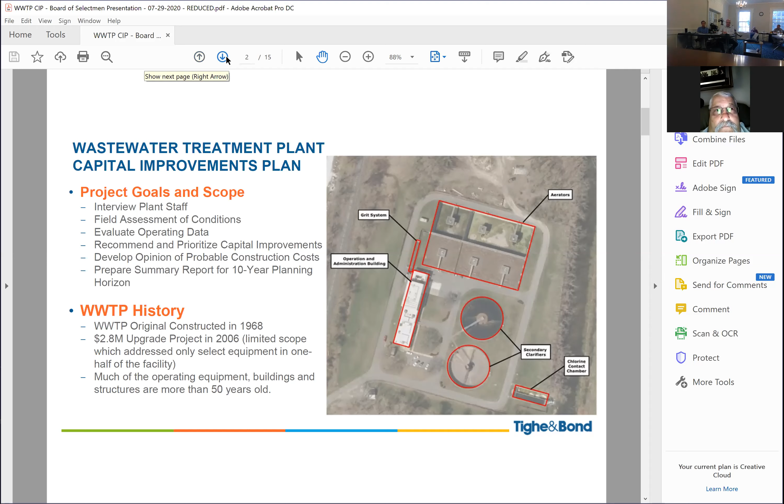NPDES - National Pollutant Discharge Elimination System. Yeah, thank you. We're engineers, we talk in acronyms, sorry.

My goal in these slides is to step through them pretty quickly, just to give you a flavor of what we were seeing. We wrote a report that was 70 or 80 pages of text and several hundred pages of attachments. I just want to give you a flavor for what we saw more than anything else. There are some cost tables on the back end of this, but my intent isn't to go through those in gory detail - really just to give you a broader understanding of what we're seeing at the plant, to help you understand some of the details behind the discussions happening.

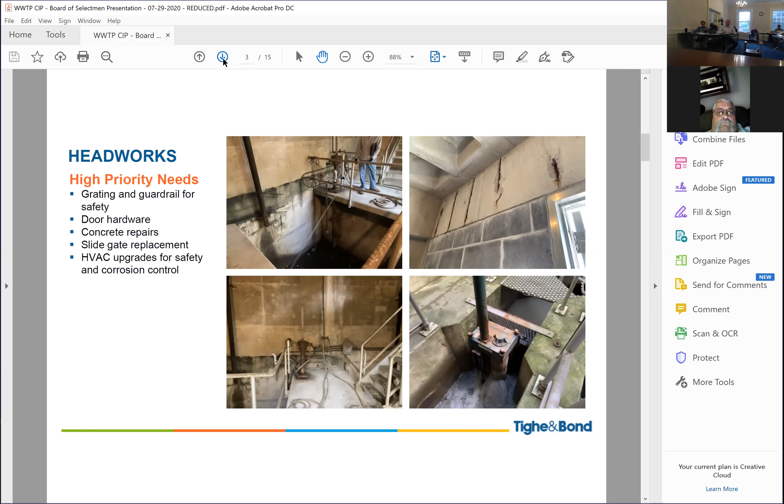In addition, as Jay mentioned and questions have come up, there's quite a bit of mechanical redundancy in this plant. So if a pump failed, it wouldn't be a catastrophic issue. The consequence of failure isn't that high if a single pump fails. So we're not recommending replacing 50-year-old pumps. That's a lot of cost. It's something that's eventually going to have to happen, but in this 10-year planning cycle, you've got other more important places to spend your money.

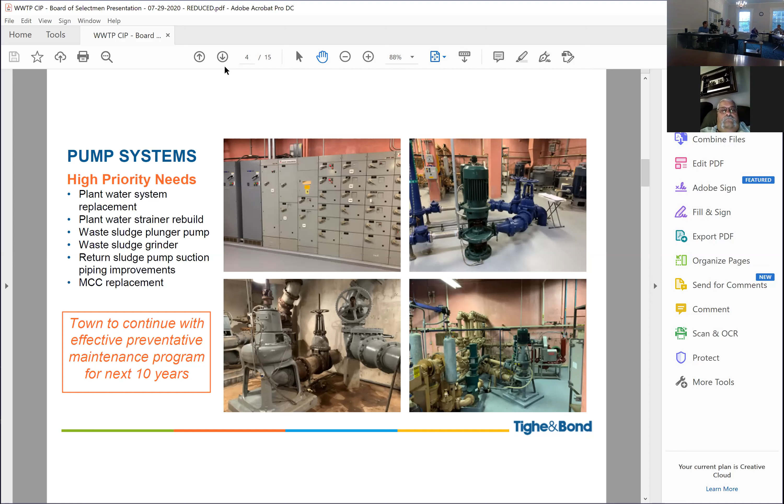To point out, the plant water system is kind of the lifeblood of the plant - it's where you reuse water from the plant instead of using domestic water. It's a way of using plant water for different services all around the plant. You save a lot of money by having one, but you have to maintain it for years. If you've ever walked through the plant, you'll notice the piping is labeled processed water - that's the same thing. But that pays off over the years compared to domestic water use pretty quickly. They'll upgrade that.

Our recommendations are it's time to put some money into the grit system - replacing these chain and flight grit sludge collectors with new sludge collectors. The gates are heavily corroded and need to be replaced. There are some minor concrete repairs - the concrete itself is in good condition, but it wasn't built as one giant monolithic pour, it was built with construction joints, and those joint sealants have largely failed, so it's become a pathway for corrosion.

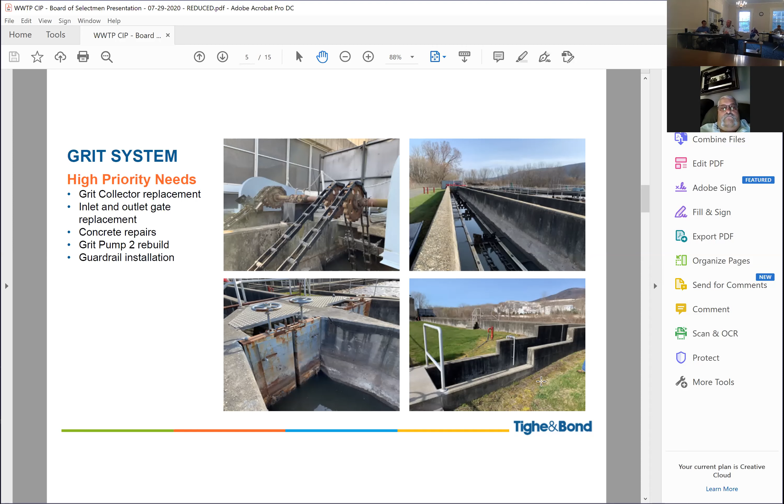The front half of the aeration tank has only been used for the last 15 years. The issue is the town hasn't been able to do any maintenance on that. There's, I'm sure, feet of heavy sludgy material packed into the corners. If one of those areas ever fails, you don't really have a good, reliable redundant backup. The north half is operable, but it's mechanical equipment that is rarely operated, 50 years old. I'd be hesitant to say you'd be able to rely on it very much for an extended period of time. So it is a reliability issue.

There are some safety issues here as well. One of our engineers on the visit with Miles was standing against a 20-foot plus drop with just knee-high concrete walls. So there's a number of improvements needed here.

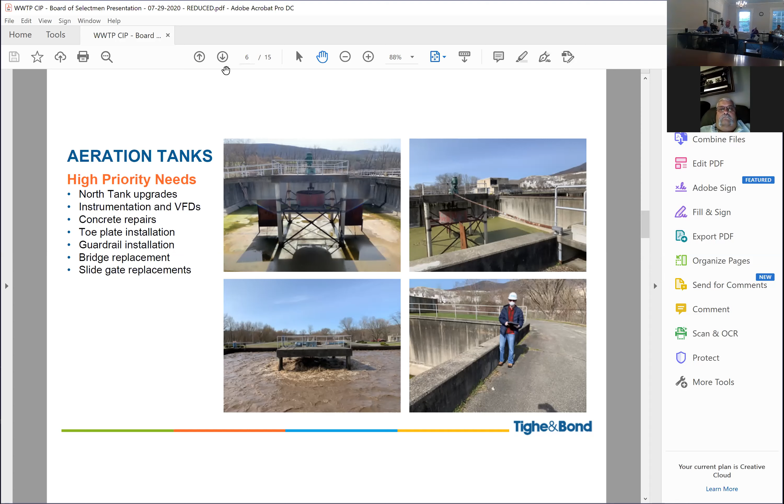Back in 2006, 2007 we replaced one of the two clarifier mechanisms — at that time, that was the bad one of the two. The other one has just continued to degrade and decay over the last 15 years. It's steel trusses are just kind of sagging. It's been band-aided back together. Over the last several years, the DEP came out and gave the town a slap on the hand for not having a backup clarifier proposed. So it was stitch-welded back together. It'll run, but this is one that would be very concerning to run for any length of time. So of all the things we're doing at the plant, this would probably be the highest priority — we can replace that second clarifier mechanism.

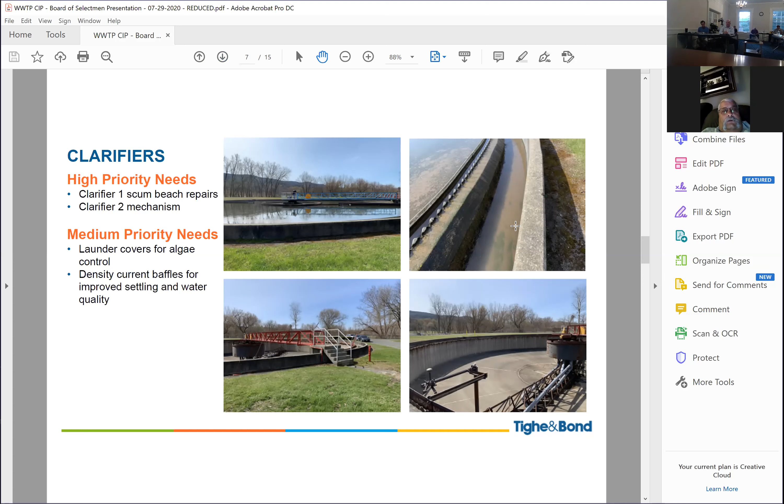Chemical area — I didn't show the chlorine contact chamber because in 2006, 2007 we did spend some money over in that area, and that's held up fine. There's really not any significant need to spend money in the chlorine contact chamber these days. The chemical feed area was also upgraded in 2006, 2007, but it is showing some signs of pretty significant corrosion. It's also an area where things just don't last as long, so let's step through what you're looking at in this picture.

In the upper right corner are two sodium hypochlorite tanks. Sodium hypochlorite is just household bleach, but a much stronger concentration here, used for chlorine disinfection of your wastewater. Those tanks are really past their useful life expectancy — we see tanks like this tend to last 10 years before the plastic in that chlorine service starts to get a little brittle and the tank starts cracking. They're still working, but they're kind of up for time. In the upper left corner are two totes, which are portable tanks, for sodium bisulfite. That works fine, though there's certainly some corrosion in that area.

The town staff would rather manage that chemical with a bulk delivery from a truck and pump it into a permanent tank rather than moving around these portable totes. So that would be an improvement with some small sodium bisulfite tanks.

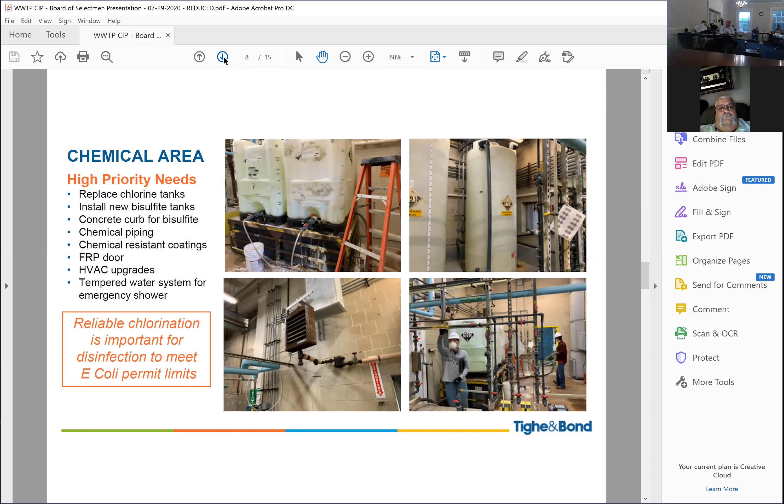The admin building, well, if you like 1968 architecture, is great. It's well built, it's reliable, and from a structural perspective there are no major issues. The roofs, other than the high roof which we replaced in 2006, 2007, could be addressed over time — whether built into a major capital upgrade, done as smaller town projects, or just managed as repair-type projects, are all possibilities.

Actually, sort of pricing it going to the contractor directly instead of folding it into a big project like this. Yeah, agree with that.

So with this building, there are doors and windows that are older, probably not the most efficient, but as we're looking at the next 10 years and where you spend limited resources, we didn't see replacing doors and windows as a hot topic here. But the spaces are really comfortable and serve their purpose for the town staff.

HVACs are an issue though. The HVAC system has fallen into disrepair due to its age — a number of thermostats don't work, and we've got some areas where heat is either full blast or off. So there are some uncomfortable areas in that plant, and spending some money there is appropriate.

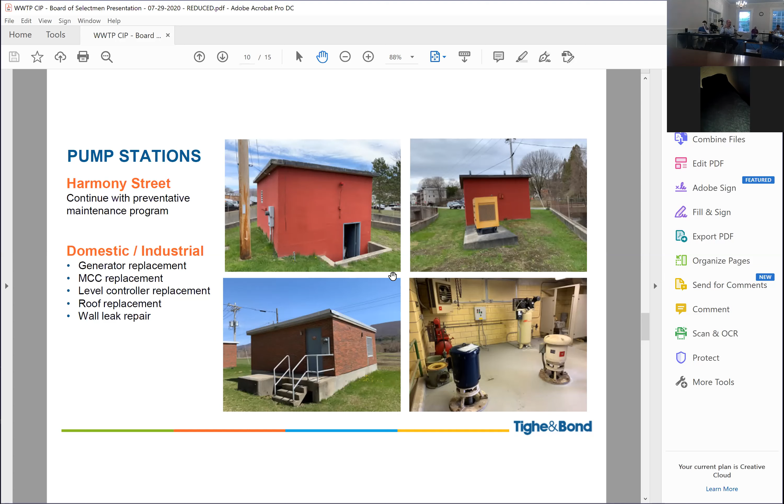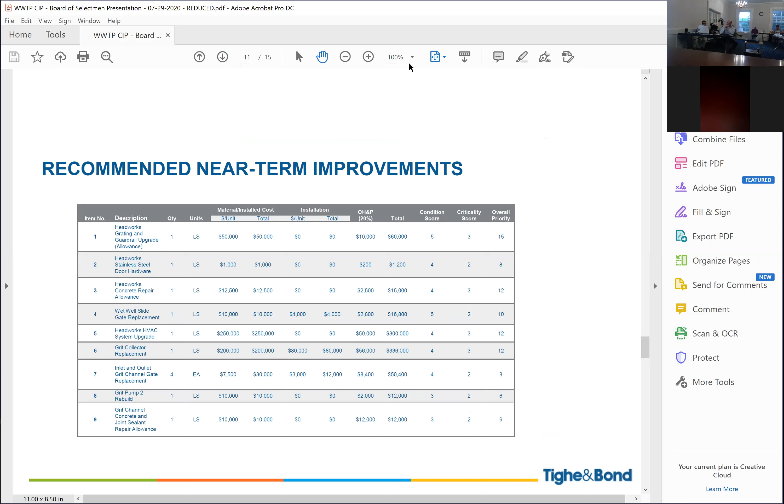That's a series of tables that I've got attached. I'll just kind of guide you through the table without going through every line, and feel free to look at the detail.

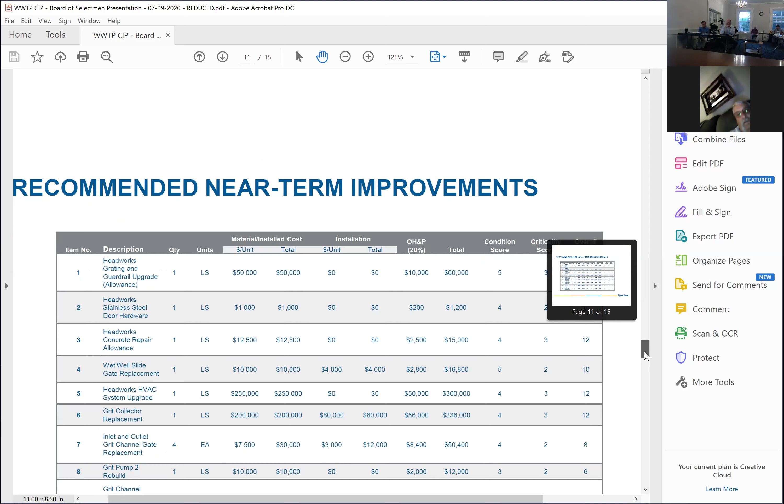We break this into bite-sized chunks where we're seeing the work, looking at material costs, installation costs for a quote. There's a contractor overhead and profit component that gets built into the overall project if they're rolled into a bigger project, and then as town staff requested, this totals to something over $4 million.

Not every one of those improvements is equal in need, so they have to take a look at that from a priority perspective. We looked at each item with a condition score of 1 to 5, and a higher score is worse, the lower score is better.

A 5 would be a high priority, really poor condition. Then there's a criticality score of 1 to 3. Critical for us would mean consequence of failure would be very bad for the town, very major safety issues would be a high critical type of need. On the other side, if there's a low consequence of failure or the safety issue might be minor, it would be a lower criticality. So you get an overall score here that ranges from 1 to 15.

These are all the high priority improvements, so they tend to be on the higher side just naturally because we self-selected all the high priority ones. But not everything is in the same overall priority. There are some economies dealing with an overall project, you might be doing three things in one area that are higher priority, and you might want to lump in a medium priority item and wait just to get it all done in one area. So those are some decisions that will have to be made as the town thinks about a capital upgrade done this way.

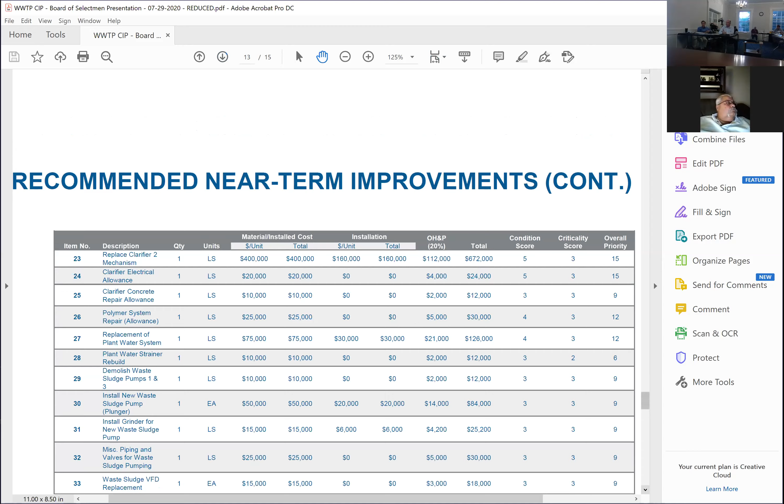This table though pretty much follows the sequence of the first grid. It does end up following the order that we went through - we could organize it other ways, but that's how we set it up. So if you scroll to the last page of this, it does have a total at the bottom, and it's $4 million and change of what we've identified as in the high priority category.

There are some things the town is already doing, continuing maintenance activities, so we pulled some of those out that we're aware the town is doing. The challenge with any of these projects is some of these things that might get moved into a capital plan are probably going to fail between now and then, so there's some things you just got to recognize will be continued maintenance.

I guess the last thing I'd say is, if you talk about a project in the order of $4 million or whatever it is, the work we have specified, it's only a small component of the overall asset the town has. You've got a plant that, constructed today even downsized, would be a $50 million plant or something like that. So you've got a huge amount of cost invested - the way it's constructed at a larger scale, it could be an $80 million plant or more.

So there's a lot of cost that the town has invested previously. This only scratches the surface in terms of the total value of the asset.

So, Jay, Robert, anything you wanted to add?

So that gives you a snapshot as to the nuts and bolts of the equipment and the overall condition of the plant. So the next part I'm gonna ask the guys to go into for us is essentially, how will we pay for it? We have a good snapshot of what we need to do first versus a little bit later down the road. But how do we pay for it?

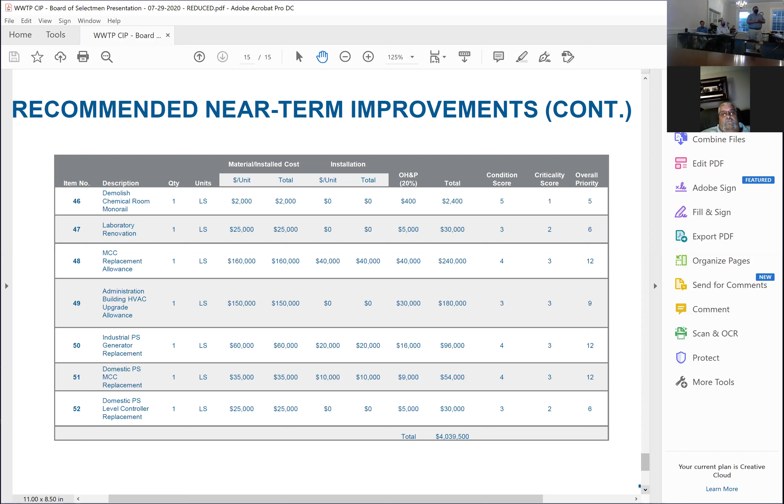However, what we're hearing is that if that money were to become available, it would not likely be in grant format. It would already be funneled through pre-existing funding mechanisms, which is a state revolving fund for wastewater. So no matter really at this point what we do as a plant, we're going to have to carry debt. So we want to be smart in how we do it.

At this point, I'm going to turn it back over to Tighe & Bond so that Kristen Milan can walk us through what that process would look like. As I said before, keep in mind that first bond expires 2025, $175,000 plus $10,000 in interest. It's quite possible that if we go out to bond again, you could take that money and refinance the entire amount. But that's yet to be determined for sure. So that's where we are at this point.

Before we go to the next topic, I want to ask some questions, maybe get some quick answers to some of these things. Now, you're saying that there are what you call safety concerns at the plant, like railings. Now, when DEP visits, have they ever brought that up? Or should they go down there?

So DEP does go. I don't know what DEP has commented to the town operations staff about safety issues. I don't know, DEP sometimes makes comments on safety, sometimes they focus just on environmental, so I don't know what they're expecting from comments.

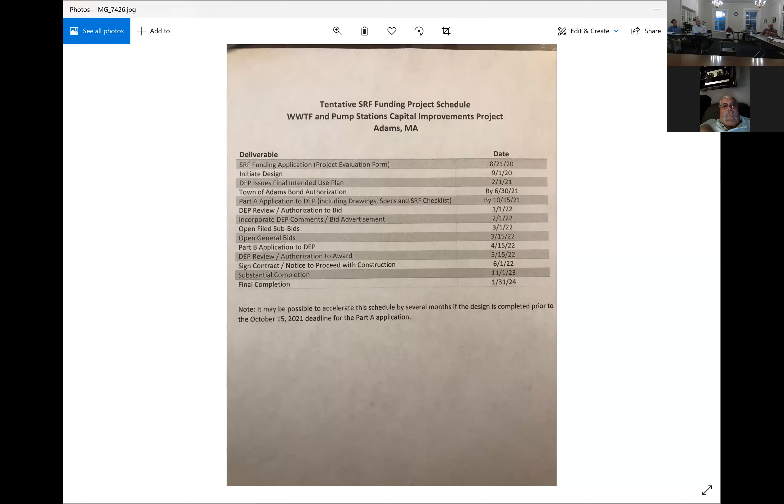The potential carrot out there, following up on what we're talking about, is the federal stimulus. If the federal stimulus does come in past economic downturns, that's been funneled through these types of programs. The expectation, when you hear folks talk about an infrastructure package, is that they always spend money on transportation—like 80%, 70% of the money goes towards transportation projects. But water and wastewater do get funding, and it can be significant, so that would tend to go through a loan program like this.

It would be funneled to the town like a grant, as loan forgiveness. So it wouldn't be 100% loan forgiveness, but there would be some loan forgiveness that ultimately would be attractive. The thought process is: apply for the SRF loan in this next cycle and position yourself to be ready to receive that kind of funding if it did come down the pipe.

SRF funding is really geared towards projects with environmental benefit. What's attractive about this project in a lot of ways is it would probably have a whole bunch of little things that would allow us to write a loan application that checks a whole bunch of little boxes. So you would score reasonably well.

You're not doing a major nutrient upgrade project or something like that that's going to get the top score. You're not preventing combined sewer overflows from being discharged to a river, which always scores very high. So you're going to be a reasonably attractive project. It's a question of how much competition is out there, but we tend to expect that this kind of project will score reasonably well, and it would likely get funded.

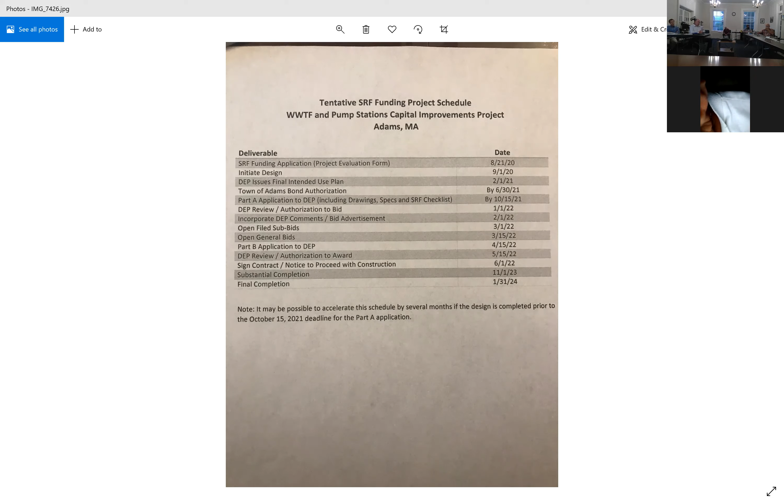So one of the questions we're probably going to ask, and why I asked this, is: we're making a payment on the previous upgrade that ends in 5 years. Is there value in going down this path and investing in trying to get that down to 0, but is there a way to go through this process so that by the time we're ready to start, it's pretty close to 5 years when we have the other one paid off?

And it becomes a lot easier for us to just get another bond or loan, whatever it may be. But the question now becomes, we've been talking about these alternatives, but what about the plant itself? We've been upgrading, rebuilding pumps, and making it work, investing that money every year to keep it going.

What are your thoughts if we took the 5-year total plan, but started the paperwork process, tried to get a 0% loan, figured out how much it costs to develop the plan, and then just ran into paying another payment? It will be higher than the current one, but we're already paying now. So what are your thoughts about the plant continuing to operate?

We continue to use capital funds to fix the issues, and then at 5 years, or maybe 4, I think we'll be in a much better place, starting to get it upgraded a year earlier. I think it has to happen. I'm just trying to buy some time for those 5 years to come, roughly from now to the end of the current debt.